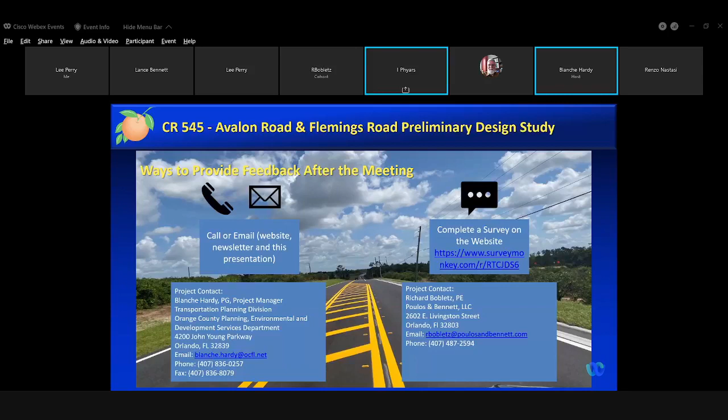The purpose of this study is to identify preferred improvements, document project needs, and balance the safety, mobility, and comfort for all users. Consideration is given to all modes of transportation, including automobiles, pedestrians, cyclists, freight, and transit.

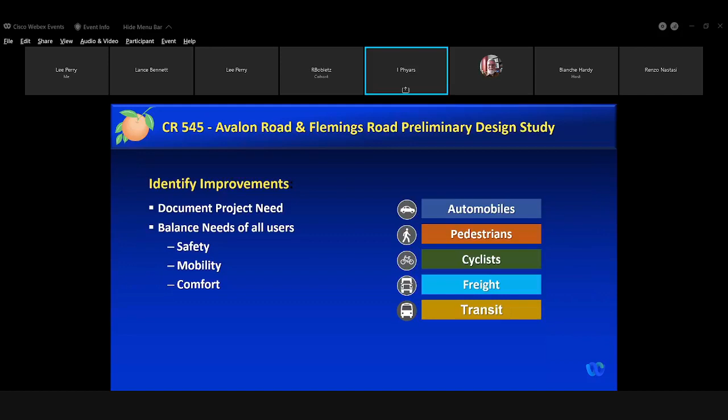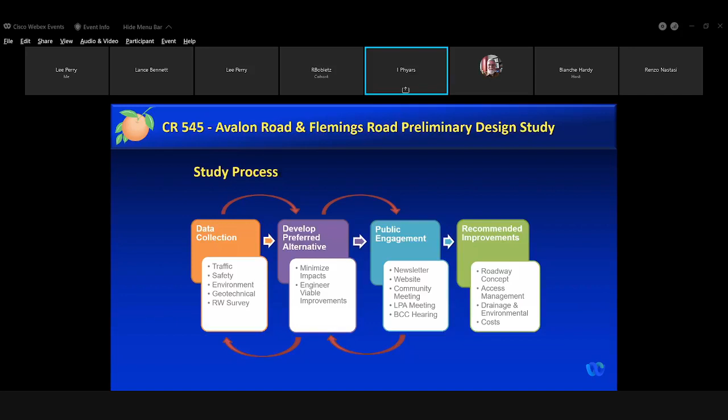The study process starts with data collection. Once this is complete, a preferred alternative is developed and we move to public engagement, which we are doing this evening, and then on to the recommended improvements. The following slides will provide an overview of the existing conditions along the project. Items listed on the screen will be addressed.

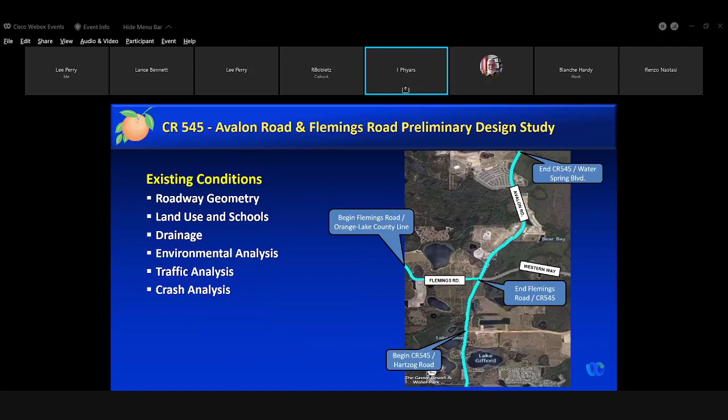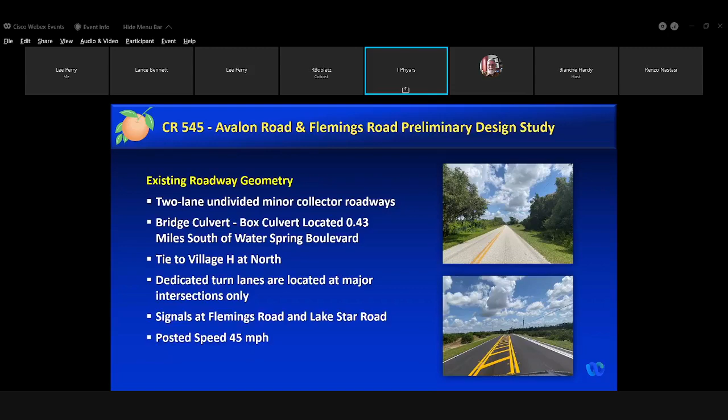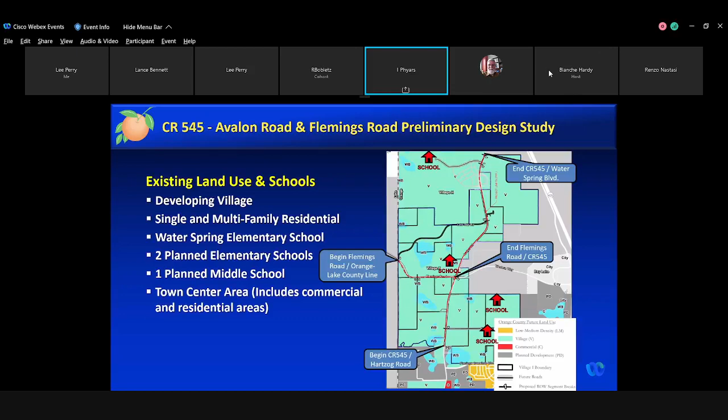Traffic lights are located at Flemings Road and Lake Star Road. Land uses along the project are planned to be developed primarily as single-family homes and a commercial or village center near the Flemings Road intersection. There is one existing school, Water Spring Elementary, and 3 future school sites indicated for the area, 2 elementary and 1 middle school.

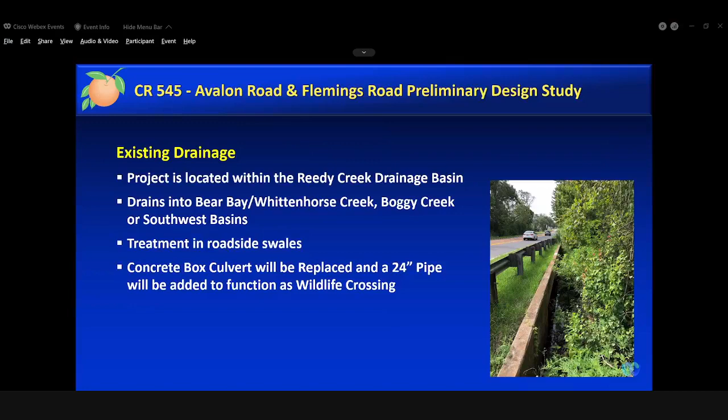Moving on to existing drainage. This project is located within the Reedy Creek drainage basin, with runoff following generally west to east. The roadway runoff is currently collected and treated in roadside swales before ultimately flowing into the basins identified on the next slide. This study also recommends replacing and extending the existing box culvert and adding a 24-inch pipe alongside to function as a wildlife crossing, providing animals a safe and dry way to cross once the road is widened.

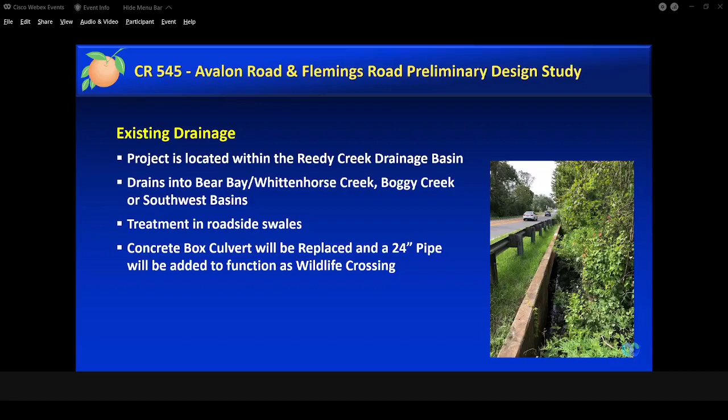There are 11 drainage basins within this project, as seen on the screen. The water flows generally from west to east across Avalon Road. Ponds will provide treatment and attenuation for Avalon Road and some adjacent properties.

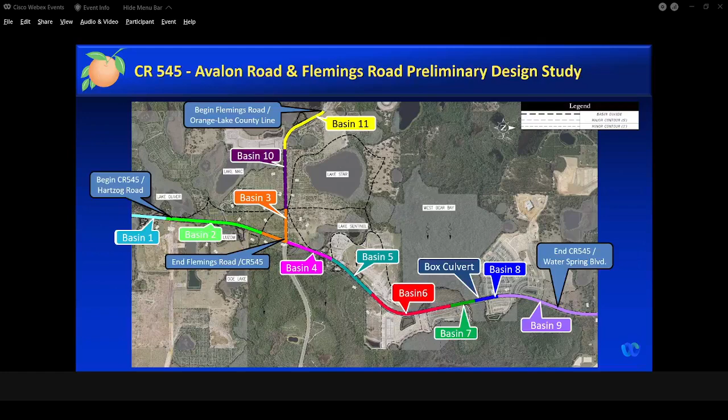Environmental analysis was conducted on the project site to determine the location of wetlands. 7 wetland areas are located in the study area, shown here in green.

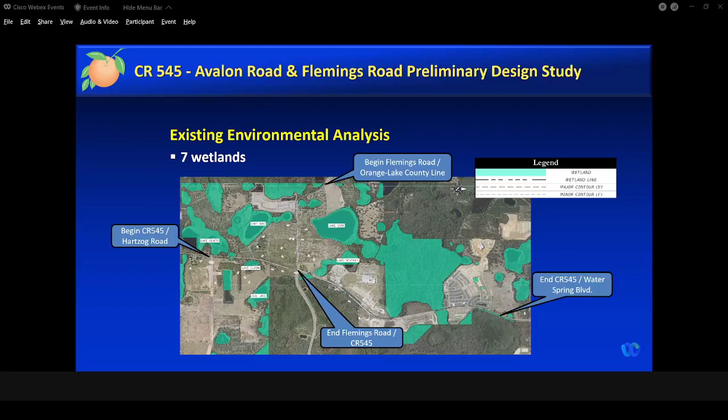Continuing with environmental analysis, no protected species were observed, but despite that, habitat may still be present for the species shown. Habitat may have been diminished over time as a result of human land uses, and no occurrences of listed species are expected. The project was also reviewed for cultural resources, and no historic buildings or archaeological sites were identified.

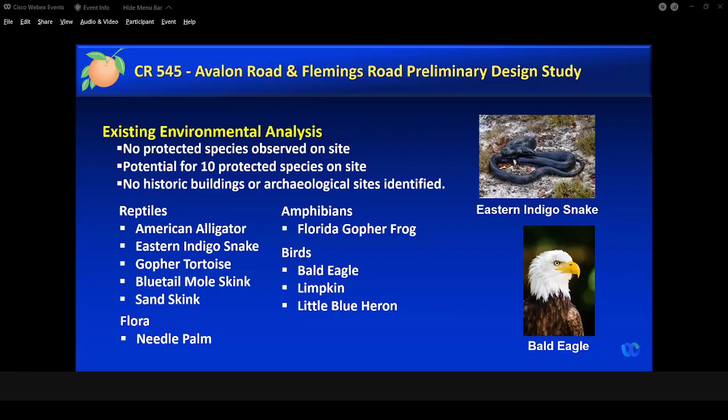Moving on to traffic. The traffic volumes along Avalon Road range from 12,000 to 14,000 average daily trips. This results in a level of service C throughout the project.

The design year for this project is 2047. Traffic is projected to increase to 36,000 average daily trips for Avalon Road and 33,000 average daily trips for Flemings Road. With that scenario, if Avalon Road and Flemings Road are not widened to 4 lanes, both these roadways and all intersections will fail in the design year. Therefore, Avalon Road and Flemings Road need to be widened to provide the needed capacity.

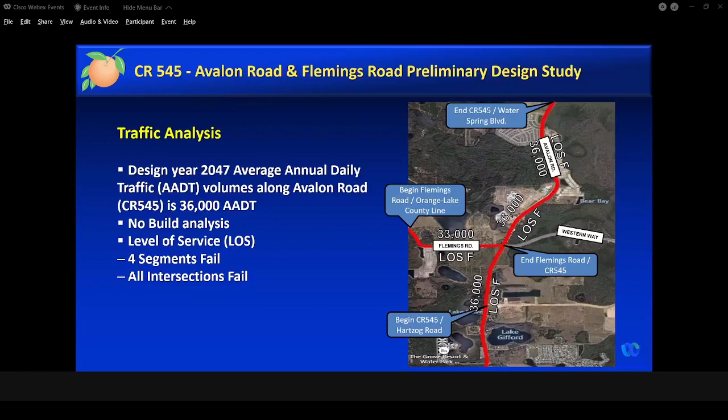Another aspect looked at was 5-year crash data collected and analyzed along the corridor. There were a total of 60 crashes within the 5-year period, resulting in 1 fatality and 23 injury crashes. Most of these crashes were rear-end and occurred at intersections, as shown on the graphic. No bicycle or pedestrian crashes were reported. The proposed improvements to Avalon Road will enhance safety and reduce crashes along the corridor.

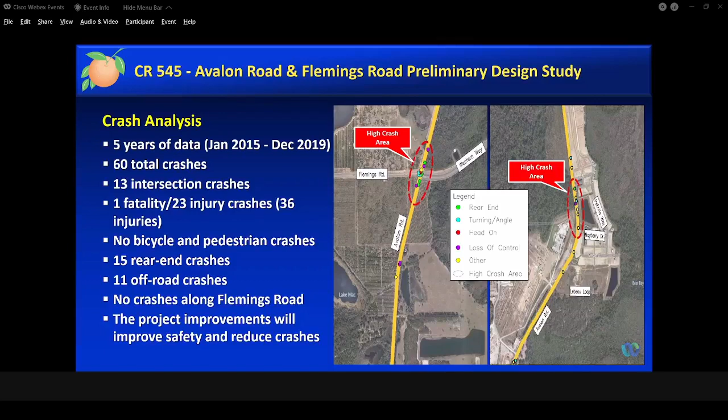This is the typical section of Avalon Road, showing what it will look like in the future. The proposed design provides 2 12-foot travel lanes in each direction, separated by a 22-foot raised median for safety and room to turn for turn lanes in future development. It also provides pedestrian access via a 6-foot sidewalk on one side and a 10-foot multipurpose trail on the opposite side, including lighting on both sides of the road.

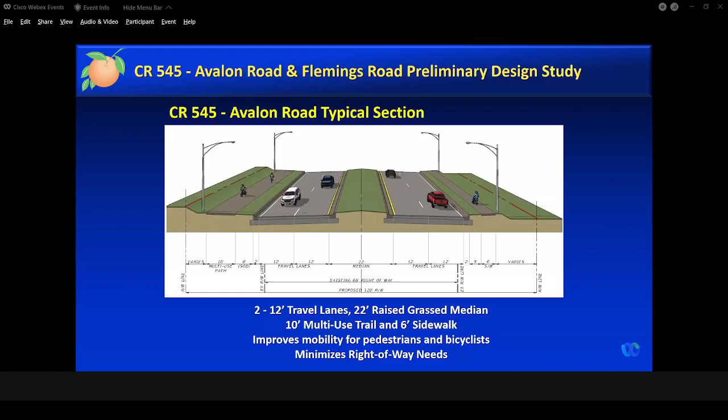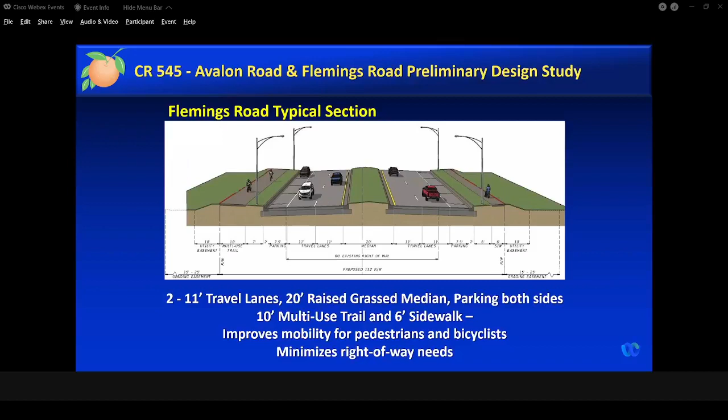Flemings Road's typical section proposed design provides 2 11-foot travel lanes in each direction, separated by a 20-foot raised median for safety and room for turn lanes into future developments. It provides on-street parking along both sides of Flemings Road to accommodate the future town center area. This too has a 6-foot sidewalk on one side and a 10-foot multipurpose trail on the opposite side, and also includes lighting for pedestrian safety.

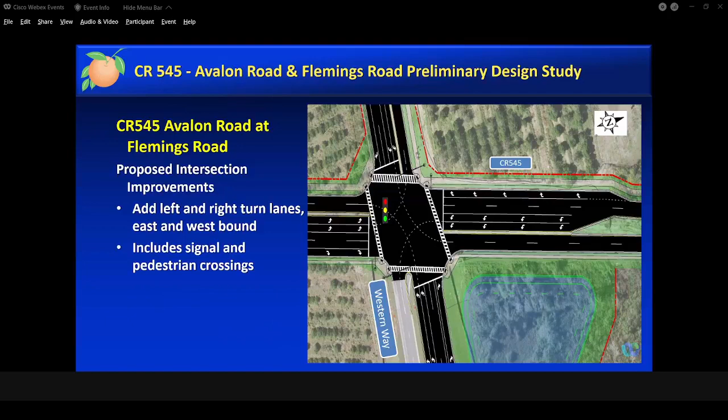Intersection improvements are proposed for Avalon Road and Flemings Road. These intersections include traffic signals, turn lanes, dual left turns in all directions, right turn lanes in all directions, crosswalks, and pedestrian signals.

Near Water Spring Boulevard, we have a proposed midblock crossing. This will help ease the movement of pedestrians coming from the residential area on the east side to get to the school on the west end and Water Springs Boulevard, and vice versa.

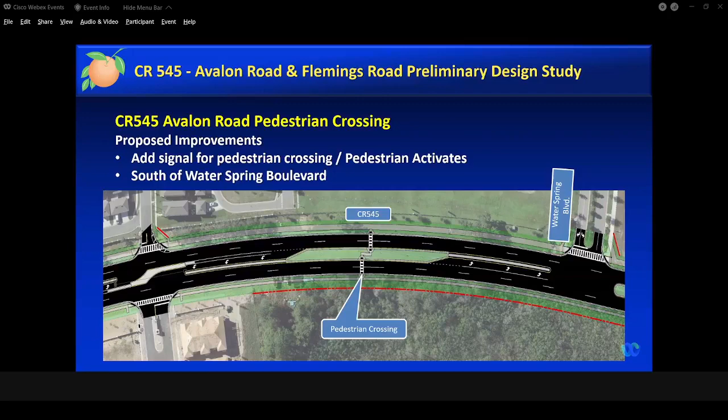Now let's talk about stormwater ponds. Currently, there are 5 existing ponds shown in orange on the slide. This study proposes utilizing the existing ponds along with proposed ponds shown in blue to provide the stormwater treatment needs created by the roadway improvements. The 5 ponds shown in blue have an alternate pond site shown in yellow.

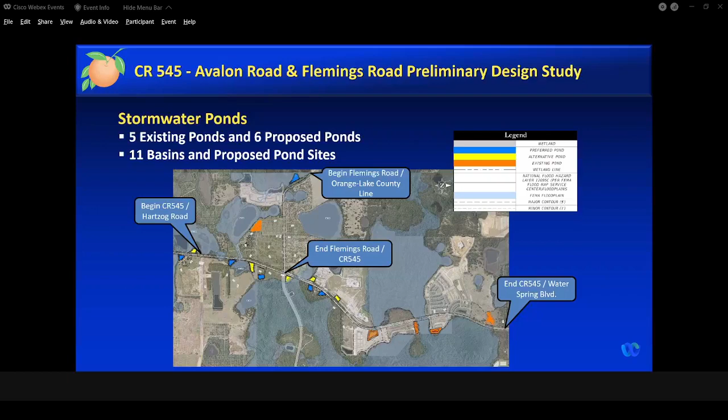Access management is carefully planned for the location type and design, and access includes medians and median openings. Controlling access results in fewer conflict points, which improves safety, as illustrated in the slide below. The study updates the corridor for future development while allowing adequate access points and meeting access management criteria in order

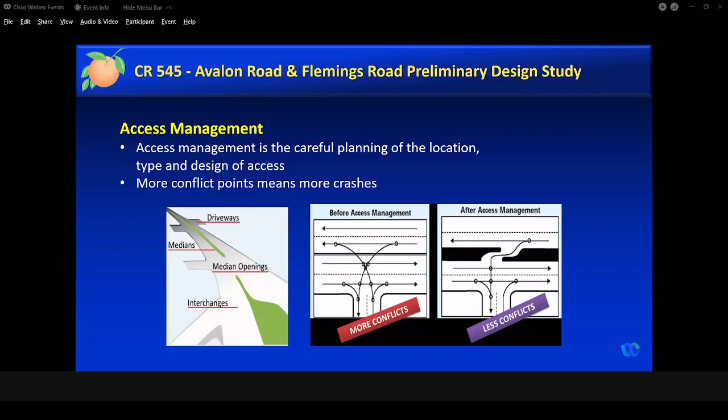to reduce crash incidents along the corridor. This preliminary design study reviewed and analyzed several different improvements to Avalon Road in order to make the corridor safer and prepare for the influx of traffic expected for the area with the proposed future development.

3 widening alternatives used the same 4-lane divided typical section. The alternatives included no build, which is leaving the road as is, widening to the west, widening along the center, and widening to the east.

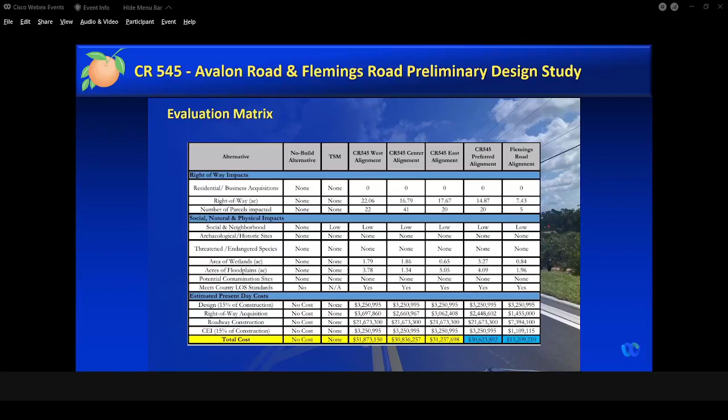The matrix shows the overall cost of all alternatives that were considered. Highlighted in blue, you can see that the preferred alternative for Avalon Road and Flemings Road has the least cost, which accounts for the design, right-of-way acquisition, and roadway construction.

Public engagement is a very important part of this project, and your opinions and thoughts help formulate the best solutions. We utilize newsletters, project websites, meetings such as this one, group and individual meetings as requested. Public hearings will also be held before the local planning agency and the Board of County Commissioners.

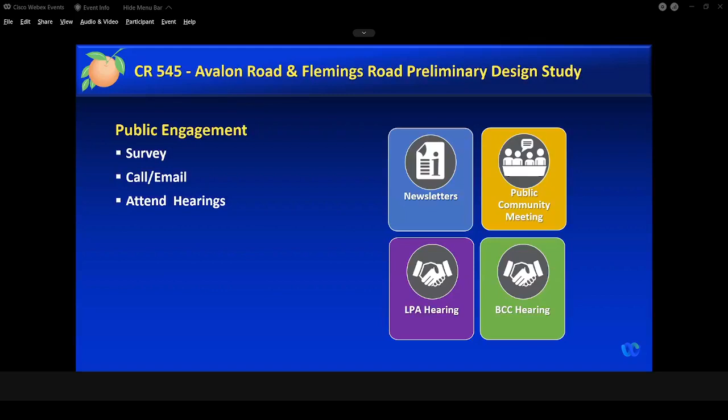This project began in January of 2020 and is expected to be completed by spring of 2022.

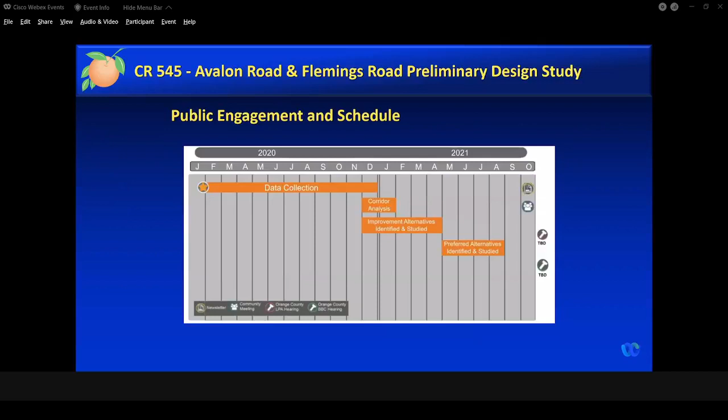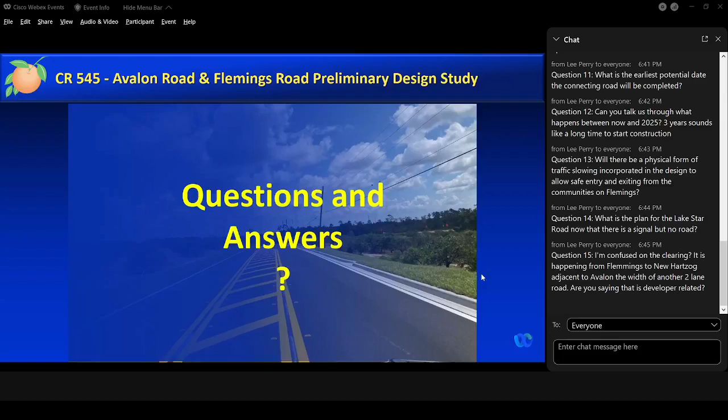Question 11: what is the earliest potential date the connecting road will be completed? We're working as diligently as we can, even though we've had some setbacks in getting these public meetings out to the public. We're still working to make that happen, and after this meeting tonight we will schedule another makeup public meeting. It'll, in all likelihood, be in person.

A little frustrated with technology.

Following that meeting, we will prepare the completion of this study by going to the Board of County Commissioners and the local planning agency for hearings. Once that is done, design will take place. It takes a year or so for the design to be completed. During that time, we'll be receiving donations of right-of-way from the participating owners, the developers.

As well as acquiring any right-of-way that is not represented by developers, which there are some. We're also working with Reedy Creek and Walt Disney. So there'll be a right-of-way phase and then ultimately a construction phase. It will be tight up to the 2025 timeframe, I'm pretty sure. And I think that leads into the next question.

Can you talk us through what happens between now and 2025? Well, 3 years sounds like a long time. However, these are multi-million-dollar projects, and there's a lot of technical information that needs to be designed into these facilities.